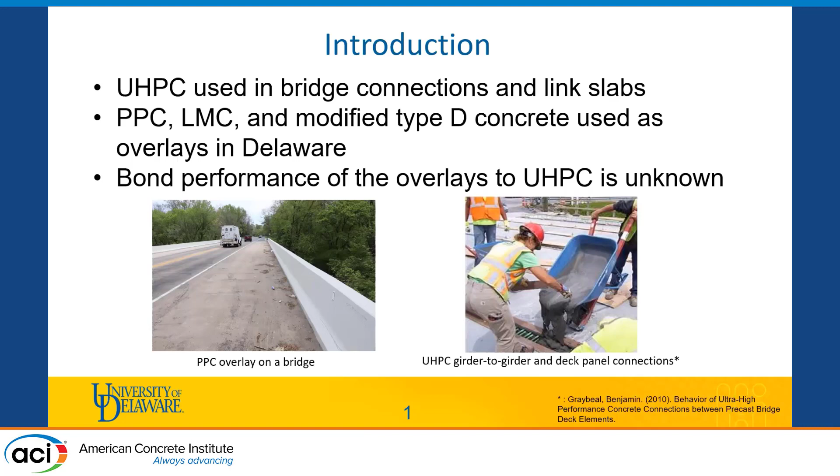Common overlay materials used in Delaware are polyester polymer concrete, latex modified concrete, and modified type D concrete. In this research, we'll be focusing on polyester polymer concrete. And when we have polyester polymer concrete bonded to UHPC, the bond performance of PPC to ultra performance concrete is not known. Bond performance of other materials has been extensively studied in literature.

So the objective of this research is, one, we need to know the sensitivity of the pull-off bond test to parameters such as coring depth, overlay age, and surface preparation. What ASTM recommends, ASTM C1583, is a minimum core depth of 0.5 inches beyond the interface of polyester polymer concrete to ultra performance concrete. But this recommendation is for normal concrete, not for ultra performance concrete. There are also no guidelines for overlay age as regards surface preparation for ultra performance concrete, among other parameters.

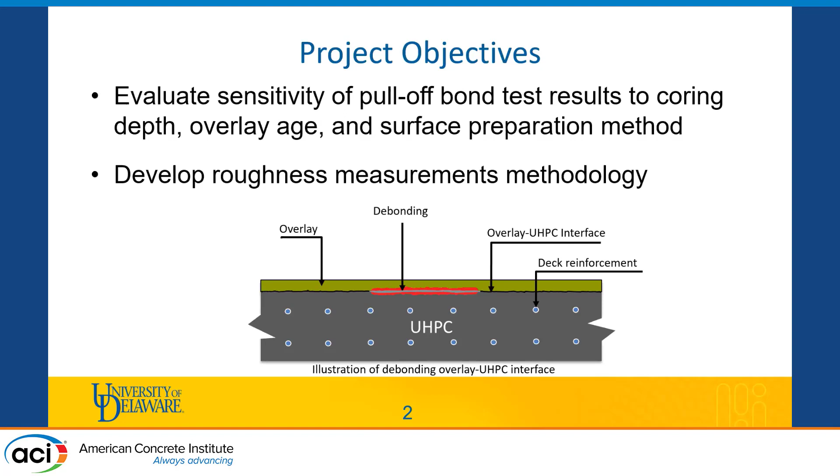Secondly, surface roughness measurements that are used are mostly for normal concrete. There are no guidelines for estimating the surface roughness of ultra performance concrete. So what we have in terms of current guidelines is, one, a minimum bond strength of 250 PSI is recommended by AASHTO T-34 and ACI 548 when you have overlays on normal concrete.

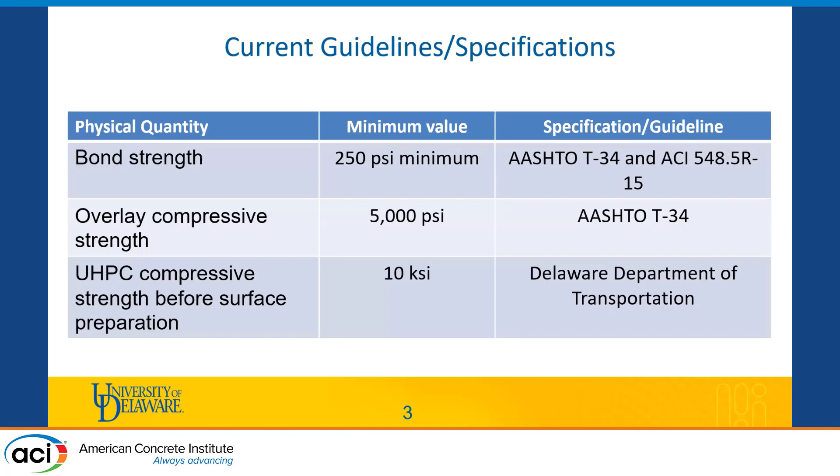We also have a recommendation of the overlay having a minimum compressive strength of 5 KSI. And the Delaware Department of Transportation requires that ultra performance concrete should have at least 10 KSI before you prepare the surface and apply your overlay material. So bearing this in mind, we prepared our test specimen to have a slab base, just to have some level of robustness in our specimen.

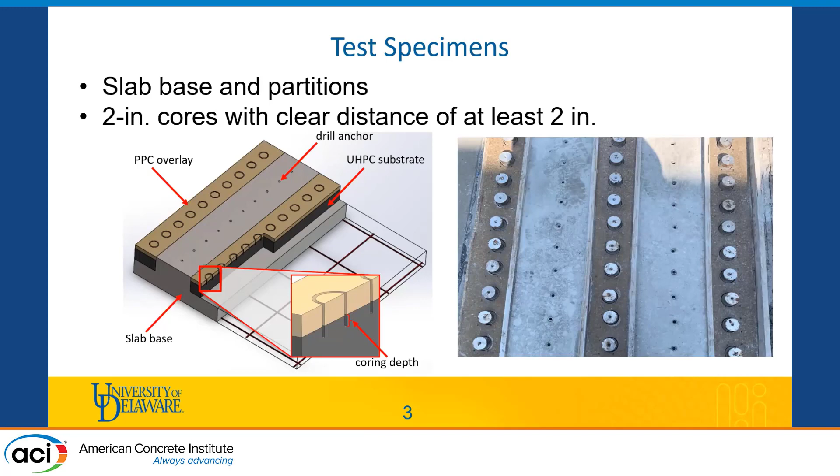We have nominal reinforcement in there to control thermal shrinkage. And on top of that, we have our ultra performance concrete, which is 3 inches deep. On top of that, we applied our PPC material, which was 1 inch deep. We partitioned the slab to allow us to have areas where we can put our drill bits such that we can drill on either side of the slab. Each core has a diameter of 2 inches. And this is as recommended by ASTM C1583.

So to prepare each of these surfaces, we adopted 3 surface preparation methods. The first one is the use of a surface retarder, whereby after pouring the UHPC, we applied a light layer of surface retarder to delay the curing of UHPC, which was later washed off to expose the fibers. Then we also have hydrodemolition, whereby we pressure wash the UHPC surface after ensuring that it has reached the minimum 10 KSI recommended by the Delaware Department of Transportation. And thirdly, we adopted grinding using a hand grinder and sandblasting to prepare the surface.

For each of these surface preparation methods, we tried to use 3 approaches to quantify the surface profile. The first one is the use of the ICRI CSP chip, which is pretty much a qualitative approach whereby you look at the surface of the chip and you try to mimic what the surface of the UHPC looks like, and based on that, you assign a number to the surface profile. Secondly, we use a surface profile gauge, which is more of a quantitative approach that gives a number to the surface profile of the prepared UHPC slab.

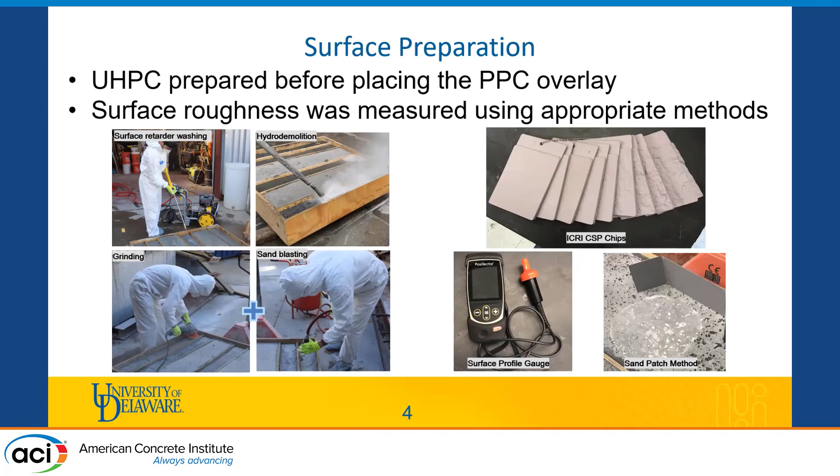And the third approach we used was a sand patch method, whereby you have glass beads that you spread on your UHPC surface, and based on the diameter and the amount of glass beads that go into the pores, you can estimate the surface roughness. To conduct the test, we use a metallic puck that looks like this, and you have epoxy adhesive glued on top of the surface, and you attach that to the surface of your polyester polymer concrete. Then we use a Proceq pull-off tester to apply a tensile force of 5 psi per second.

Since we are measuring bond performance, we can evaluate our bond performance in terms of bond strength and failure mode. When conducting this test, 4 failure modes are possible. The first one is failure in the UHPC. You can also have failure in the PPC. You can have failure at the interface of UHPC to PPC, and you can have failure of the metallic puck.

So Saber here will take us through the results and the conclusion from this study. Thank you, Abass.

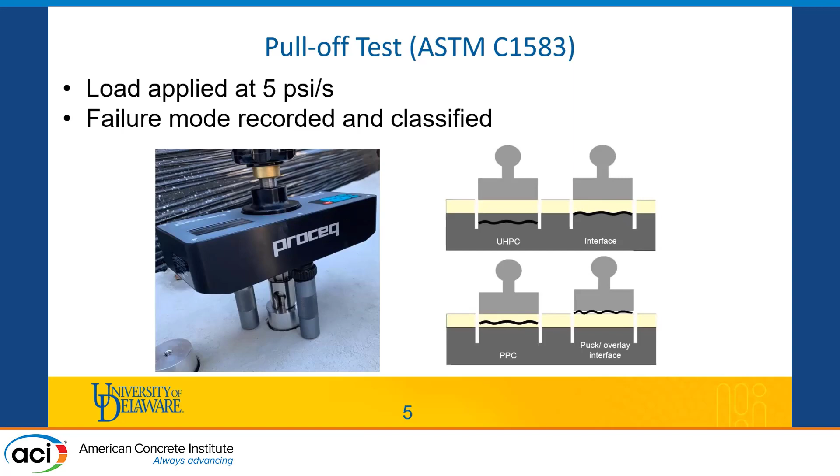So after preparing the surface, the roughness from different methods was measured with either the ICRI chips or the sand patching or the profile gauge. As you see, the surface that was not prepared looks smooth, and the average roughness with the sand patching gave a result of 0.7 millimeters, while the results from the profile gauge show that approximately 80% of that surface has a roughness below 1 millimeter.

Now, moving forward to the grinding and sandblasting, it clearly looks more rough than the no preparation, with an average sand patch result of approximately 1.2 millimeters. And the graph of the empirical cumulative probability of the profile gauge results shows more roughness because the graph is more inclined towards the right.

And with the last 2 methods, the surface retarder and the hydrodemolition, they are comparable in terms of exposing the fibers. And it's worth mentioning that those fibers are exposed to corrode over time, especially since we left our specimens to cure for at least 28 days to limit the effect of the autogenous shrinkage. It's also worth mentioning that the fibers in the hydrodemolition are weaker because of the high pressure water that was used, approximately 34 KSI in this case.

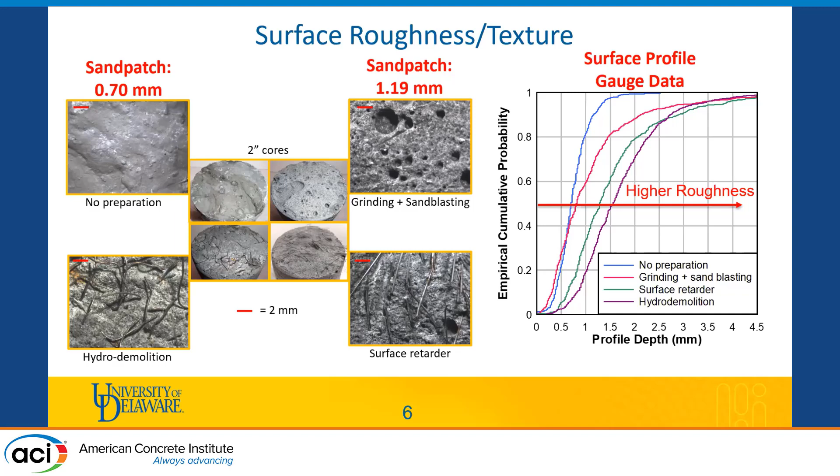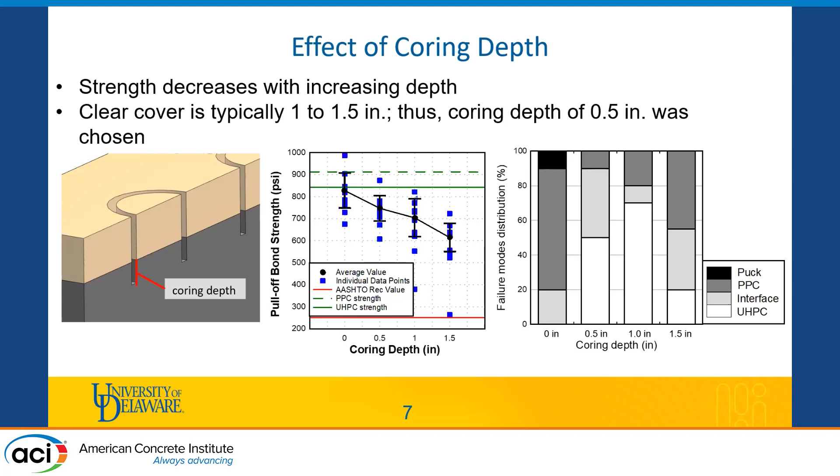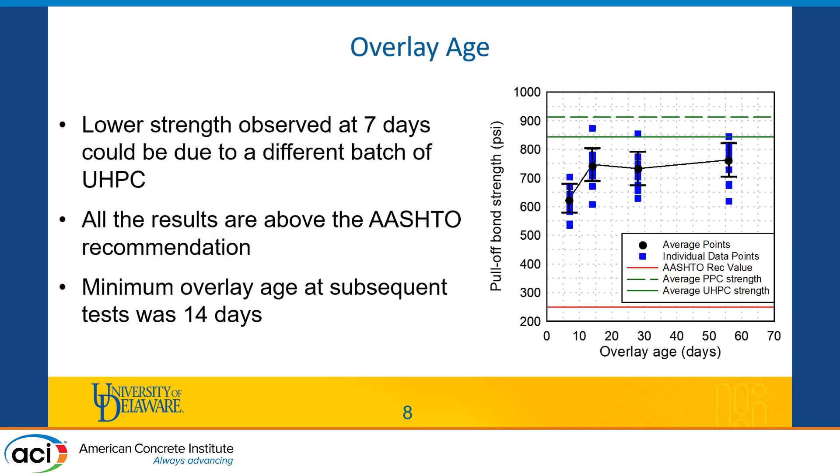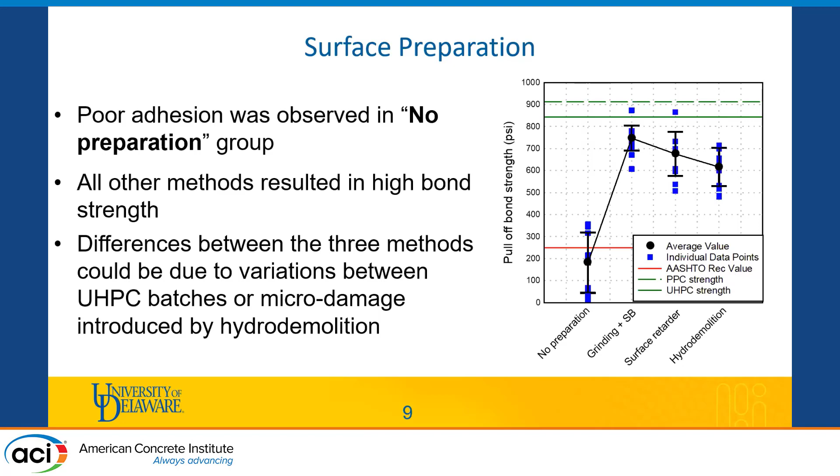With all the other methods, we see that they have good bond strength, and the average is decreasing from approximately 700 to 650 psi across the methods. And this decrease in strength is probably also due to the different batch of UHPC for all these experiments. We can see that the bond strength for the hydrodemolition is lower, and that could be due to the high pressure water that was used in this method, probably weakening the specimens.

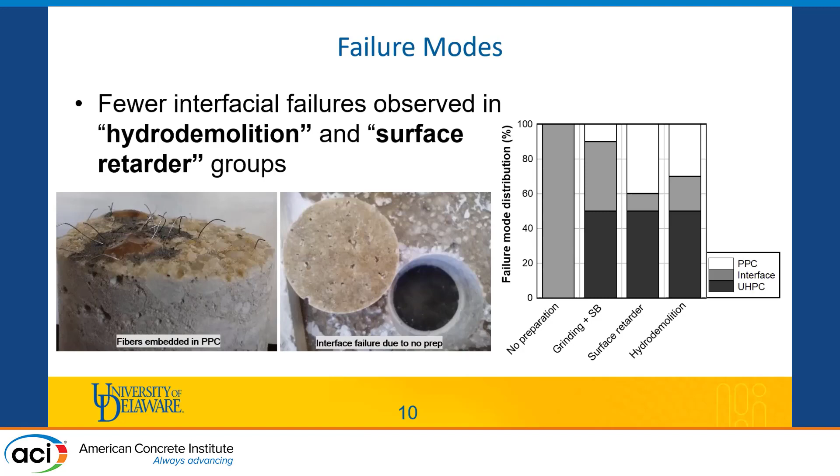We can also see here that the fibers exposed for both the hydrodemolition and surface retarder contributed to the interface by being embedded into the PPC, which is an interesting thing to see. And we can probably see that only the fibers that were in the direction of the core contributed to this, and still it's a good thing to see.

As a conclusion, we can say that no surface preparation resulted in bond strength below the AASHTO recommendation of 250 psi, while the other methods proved to improve the strength to at least 2 times that value. We can also say that the age of the PPC overlay, 7 days or older, has no effect on the bond performance. And finally, using the interface profile gauge is the most appropriate method for the roughness measurement due to difficulties using the other two.

Moving forward, we'll be conducting field evaluations on bridges that have PPC as an overlay, and we'll also test different overlays such as the modified type D concrete and the latex modified concrete to compare with polyester polymer concrete.